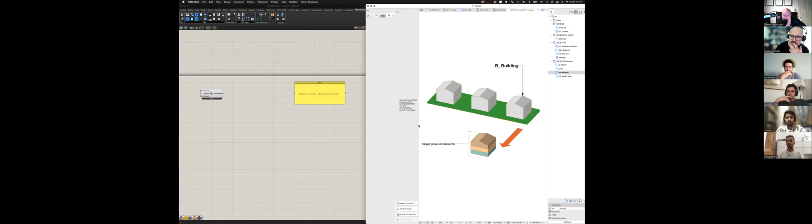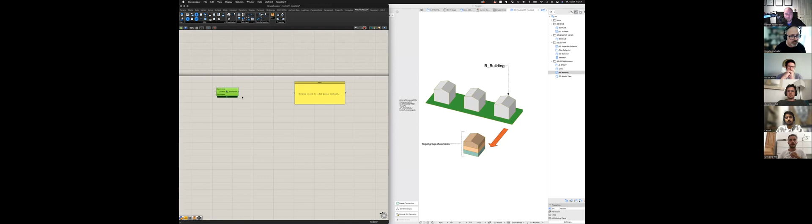So the first step: I have here a super simple example of some elements. We have one copy of ArchiCAD open here. Also, I have a Live Connection established to this file. It's not necessary for this add-on to work, because it communicates with ArchiCAD through a port, a separate communication port for these API functions. The difference between Live Connection and this Tapir plugin is that they are in fact complementary, because we can use some of the nodes from Live Connection to get the elements and work on them. So the first step each time we want to start with the add-on is to establish the connection. And for that, we have this node called the connection port.

And most of the nodes work like this: they have a print to panel output, and some inputs which in fact control what we see in the print to panel. Thanks to this, we have a kind of menu where we can choose the options. So this is a workaround for choosing from many options. In this case, when we connect it, this node scans the available ports and connects with each port. So this is also time consuming, because there are around 40 ports available.

We can have many copies of ArchiCAD open at the same time, and we would like to connect only with one of the copies or all of them to make changes in all the projects at the same time. But in this case, I have one copy, so I have just one element to choose. This is the number of the port.

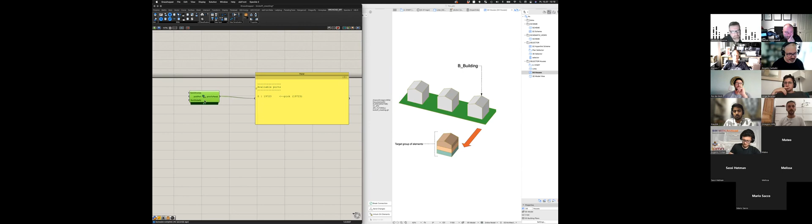So basically this is the first thing we need to do. To avoid this node searching for a port each time we make changes, we can turn it off, set it to false, because the port number is saved into the global variable of Grasshopper. It's there and will be used by other nodes to communicate with ArchiCAD, so to avoid scanning available ports, we just turn it off.

The other thing is something called run globally. It's for some functions, if we have nodes that are setting values to properties or reading them, and we don't want to do it constantly after each refresh, we can also set it to false. So it's like a global on and off for the other elements.

So let's start from the total basics. We have four groups of nodes. One is classifications, and here we are covering the possibility of getting the classification systems and setting the classification to an element. What is missing for the moment is getting the class of the element.

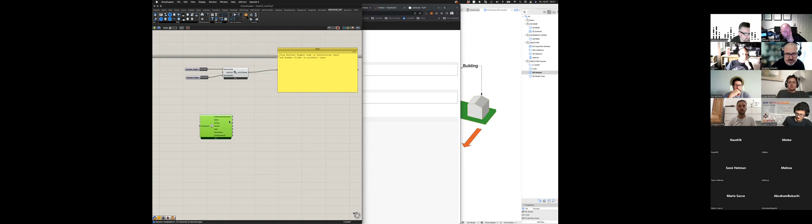Let's see first what classifications we have in the project. For that, we take the get all classification systems node, which is now reading all the classifications available. We can print it to a panel, and we see that we have 3 available classification systems.

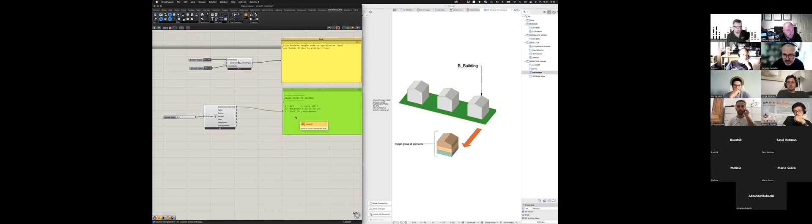If we check it here, we have 3 available classification systems, and since we have 3, we have to pick one. That's why we have the options to pick from. I'm taking a slider node just to pick from 1 to 3, and now I can choose from which classification system I want to see the classes.

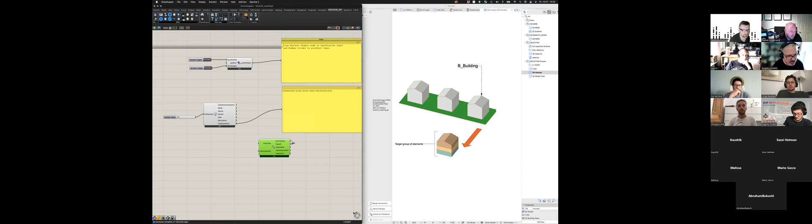I have here as an output the class system ID, so if I connect it, you see we got the ID here. I can go to another node, which is get all classifications in the system, and pick the panel. As an input, I'm connecting this ID, and then I have to again put some slider just to make it available.

Now it will read all the classifications, all the classes of this system. If I change it to number 2, it will show all the available classes of this system. We are now with the API system, and these are the classes of this system, so I should go here at 2.

Then we can automatically set a class for each element. But how to pick the elements? That's another thing. You can see here that we have a complex structure of this classification system - we have a building, and then we have some subclasses of this element.

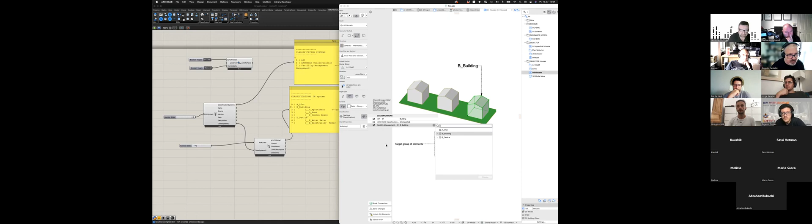Let's say we want to change this object, this element, to have a different class than it is right now - it's facility management and it's building, and we want to change it to, let's say, plot. So we need to pick the element from the project, and for that we got elements here that allow us to pick them.

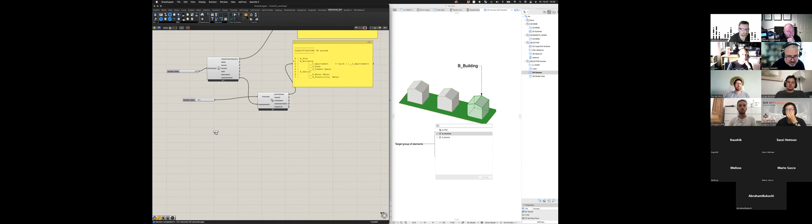For example, we can get elements by type. This is made of morph, so we can get elements by type, and again it reads elements.

Probably it needs now to be turned on, the run globally. So we need to wait for it. I clicked the other one - no, I need to open this one.

Maybe I will show a much simpler solution, since we want to pick only one element. As you can see, the performance of the nodes is also something we need to work on a bit. Let's change it to morph - I would like to pick exactly just this element, so I choose the standard node and pick just this element.

Now I have the element picked, and we can see that this is the element. What we need to get is the ID of this element, so for that we have a special node called get element ID.

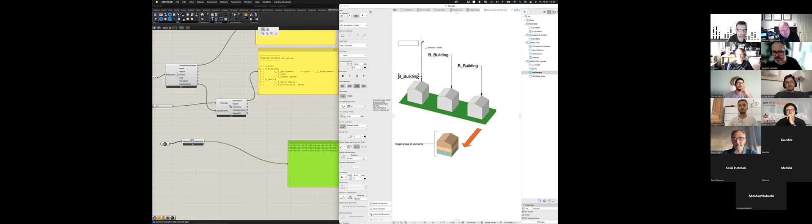In some sort of parametric way. But if we wish to select individual elements, say that you have 200 columns but you want to select 5 of them manually, then you can use the actual current live connection in order to pick the elements that you want manually, which is what Greg is doing now.

Yeah, exactly. Those options here, get all elements and by type, will select all elements in a project by type. So all morphs, or walls, or slabs, and all elements will just select all of them. So of course, in such cases, we would like to have more.

If you want to select something more specific, that's why we use the live connection node to select the elements. So for example, here I select these 3 houses that are made of morphs, and then as you can see, then they are, if we go to list item...

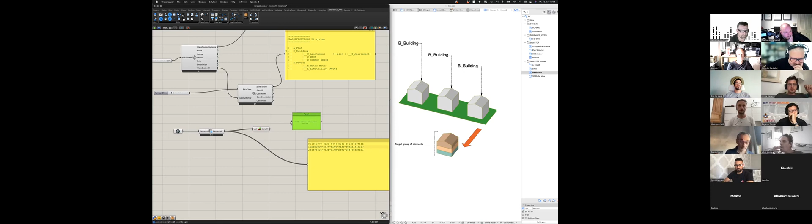No, list item, list length, you will see that of course it will just show the number of the output as the number of those elements. It's crucial because we will use something like serialization of the data output.

So we will combine outputs. If there are like 3 or more outputs, we would like to have it as one output that could be used as an input to another node.

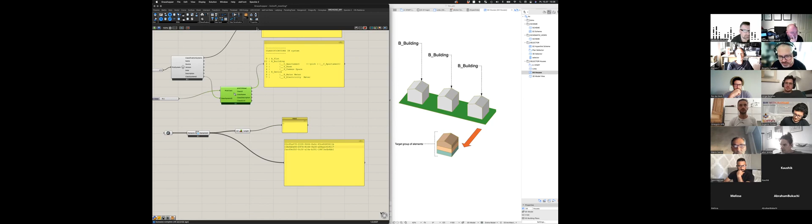So in this case, we would like to change the classification to something else. So we choose the other classification, like apartment here, and now we want to set classification of elements. So...

We need the agreed internal number of this class. So this is this number. Then we need the internal number of the class system, so it's here. And then we need element IDs.

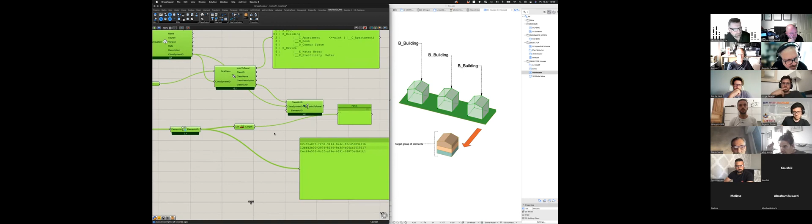And if I will just connect it like that here, it will show an error since it's performing this action 3 times. And in fact, we would like to send one bunch of data that consists of 3 individual GUID numbers.

So for that, we need something that is grouped in this block as a data serialization. So we serialize the list. Thanks to this, we have the output here. But if we connect it, you see that now it's a list, but in fact it's just one element.

So in fact, the output, if we go to list length, we will see the difference - that it shows just one output. So one set of data is at the output, and this is what we are connecting here.

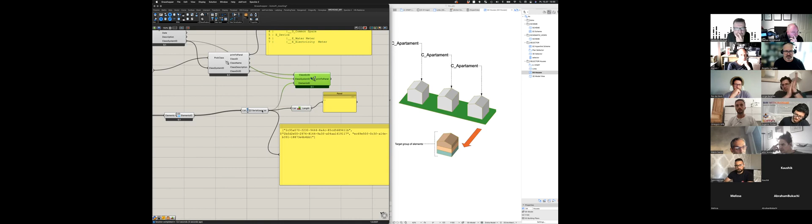And now you see that the classification is changed. Yeah, so this will be useful in many cases.

For example, with BIMx, if you would like to make a hyperlink, probably you saw those movies where one hyperlink allows you to select a bunch of elements. So to achieve that, we are serializing the list. So we have one bunch of data, but with multiplied IDs.

Yeah, okay. So one thing that I want to say, this is a quite simple example, but I think it's already showing the potential of this. So first of all, I want to just stress a few points that we've discussed.

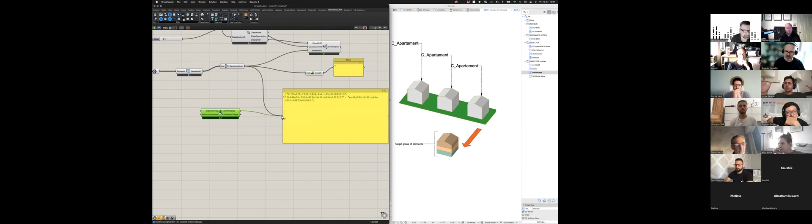One is, using the plugin, we can connect to any of the open ArchiCAD sessions, but we can connect also to all of them at the same time. Think about managing attributes or managing classifications of, I don't know, a bunch of hotlinks, for example, all of them together. So that could be possible.

The second thing is the current live connection. With the current live connection, sorry, you can set classifications, you can set properties, etc. But you can only do this to new elements that you are creating from scratch using Grasshopper.

What we are doing with this plugin, which is something new, I think, and it's important for people to understand, is that we are manipulating elements that have been created in ArchiCAD in any way - it doesn't matter, with Grasshopper, with the API, with anything, or manually. And then through Grasshopper, we can access those elements and we can rewrite properties, we can rewrite the values of classifications and so on.

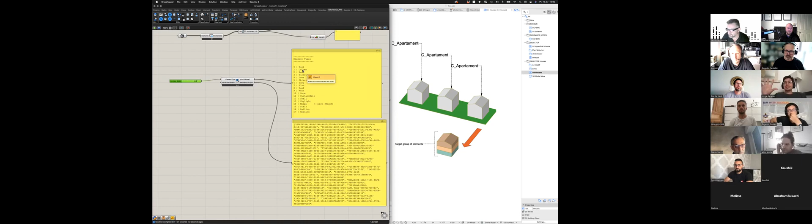So we don't need to create new elements from scratch. We can read the elements and then we can change the elements - change only the data. At the moment, there are no API functions that can handle geometry, so it's only focused on the data and properties at the moment.

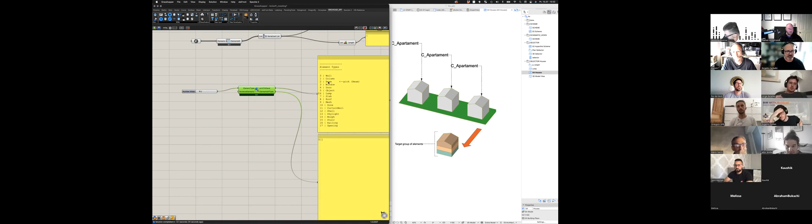This is what I wanted to show previously. We can pick the elements just by types. You see we have a list of all the types and we are controlling this by this slider. For example, we see there are no beams in this project right now.

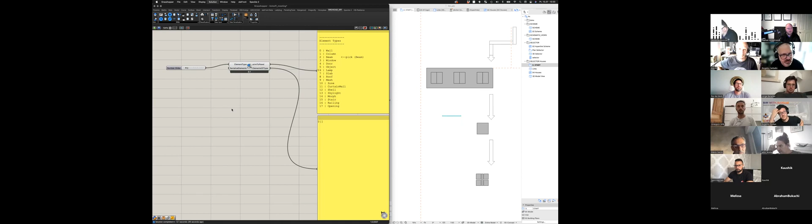If I go here and just create one, it should... probably we need to refresh the global variables and refresh it. The main issue here is a bit with the performance. It runs in Python, Iron Python, in Grasshopper, in Rhino.

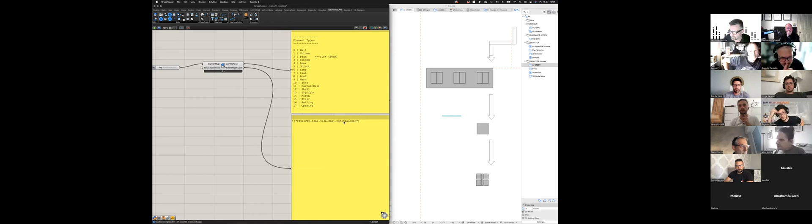You have it there, and it's already here. You can see it found this beam and just gave us the ID, so we can now do something with this beam. I think it's undefined - it's a matter of changing the classification of this element.

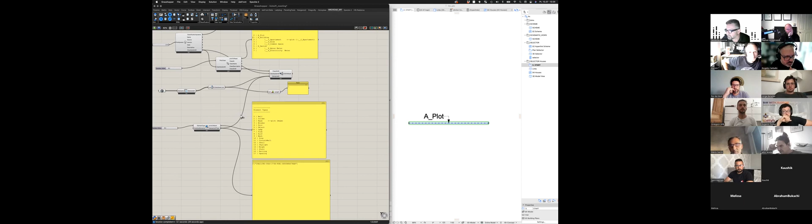But let's say it's a plot, and if we provide it here, it probably... so now I provide this element to this, so you see it automatically performs the change of this classification system. So of course that's how we can build those elements. The other thing we covered so far is classification, and the other thing is the properties.

With properties, I divided this into two kinds: built-in properties and user-defined properties. This is quite interesting because normally this Python API has no distinction between them. You can get all the properties and then you have to pick from the bunch available, the one you want. With this solution, at least they are divided at the beginning into built-in and user-defined.

User-defined are those you define normally in the classification and properties system, and built-in are just those that are read-only properties mostly, except for, I don't know, the ID of the element, which you can change. For example, here let's go back - let's change it to ID element to show what is the ID.

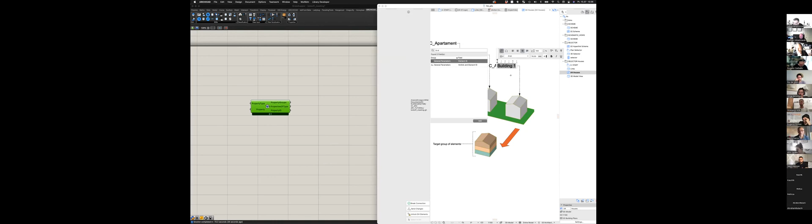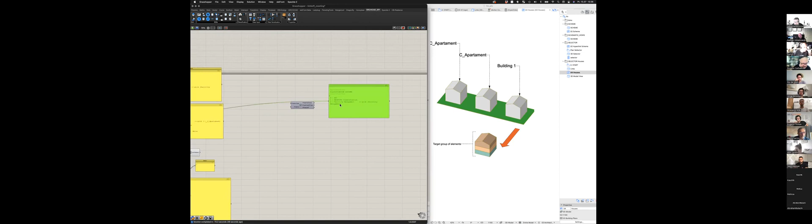Okay, it's building one. So we will try to read the ID of this element. How it works - again we have the node that we need to connect to a panel to see what we have.

These are the groups of built-in properties. They refer to type of elements - we have general, we have geometry, and anything that refers to the types of elements. So ID of an element is in general, so already by default it's set to 15. If you want to set this, we need to just make a slider from 0 to 30, so we can connect it.

Now it will go to revision, so we will have a chance to pick properties from the revision group. One of the things I'm interested in - I haven't tested on the Windows machine, and I think the performance might be due to differences between the Mac and Windows systems, and how Rhino and Grasshopper work on different systems.

Okay, so I have another panel here. Maybe I will put it like that, and I will connect the properties of the certain type. So now we have a revision type, and here are the properties of the revision. As you can see, it's done in a very simple way.

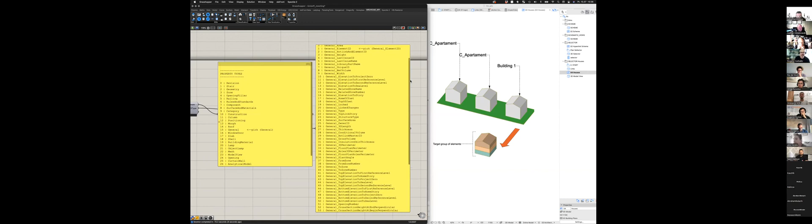Okay, so as you can see here, we got a lot of them, and already it's picked up this element ID. So you see it's number 1, and we can change this by assigning another node here.

Just answering on the fly to Sebastian. The unique ID, it's something that we cannot change, of course, but it serves us to select the elements.

But as you can see now on the screen, in the general properties, you have access to the ID of the element as well as the hotlink ID. So I don't know if the hotlink ID is something that is a property or we can change, but we can try. For sure, we can read it.

I'm sure we cannot change it. Of course, this unique ID is something that's assigned automatically to every element in the ArchiCAD project, and in fact, the API is connecting to any element by this GUID. And what about the hotlink ID?

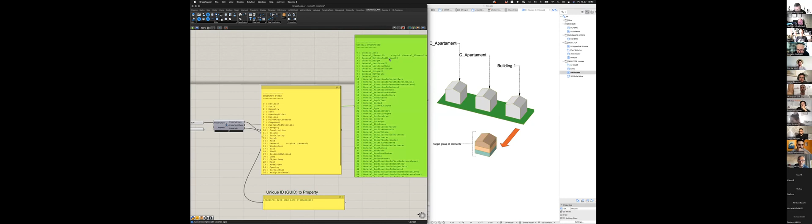I think also there is something like hotlink. It's there, it's 29, yeah it's here. But you need to have a hotlink here. I never tested this one. Okay, I think it's the ID of the hotlink.

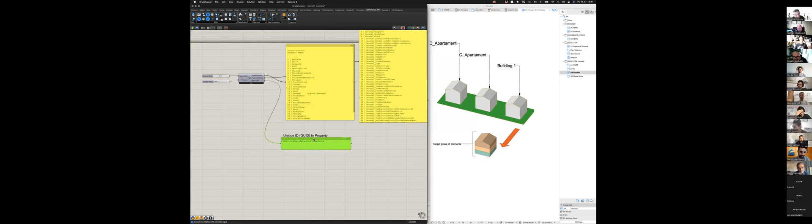Let's see what it... well, we need to read the value of this element. So I would like to show you first the whole process. So what we have now, we have an ID of this certain property. So we picked it up in this way, and then now we can use it. So how can we read the data?

We have here 2 elements like get property value and set property value. So let's start from get property value. We see that, of course, we have here the output, it will be the output we want. And then we have a property ID, elements that we want to read value from, and option to serialize this list. So I will connect this here.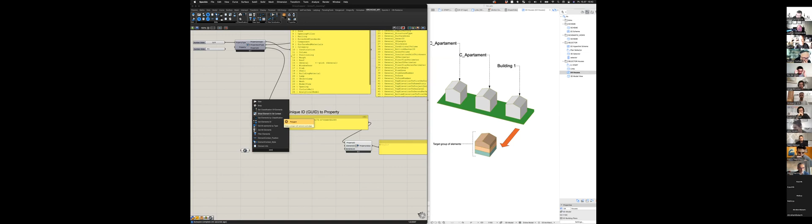So already he knows what property we want to read. And now we would like to have, again, so let's pick the one that was here. Okay, get element ID, probably it needs serialization. It's only one, but it's the matter of the format. The format, right?

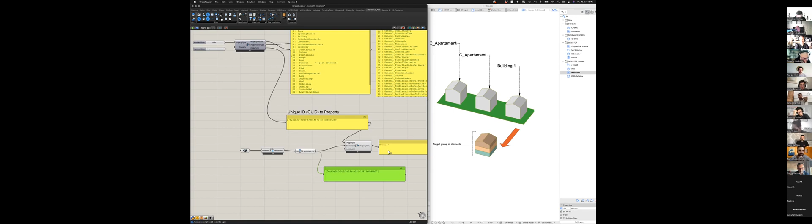So we got the ID of this element. And now we can connect it here, and here we'll see the result. So it will read the value.

So as you can see, it can read the value, but also this JSON API is not giving us only the value, but it's giving us a type of this property. In this case, it's a string. And status - honestly, I don't know what status means. I found every property has this normal status. It doesn't matter for the moment.

So, and this is like, as you can see, it's a list and it's a dictionary. So it's like value, name, a key name, and the value here, and again key and value. So to obtain this particular string of the ID, we need to separate this.

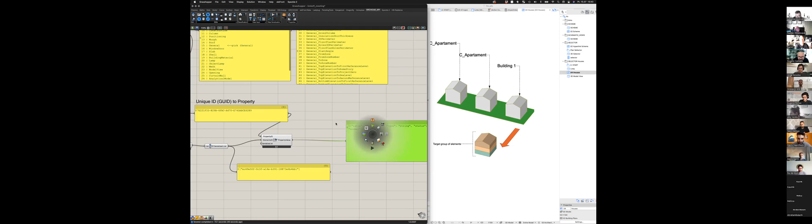So for that, we got the node that is called the serialized property. So you see that we put the property here as an input, and it will just divide it into the 3 outputs.

So exactly here we can see that I go to, so I have a value here. If I copy this, you will see that we have this type and status, but we are interested in this. So that's why we can obtain the ID of any element.

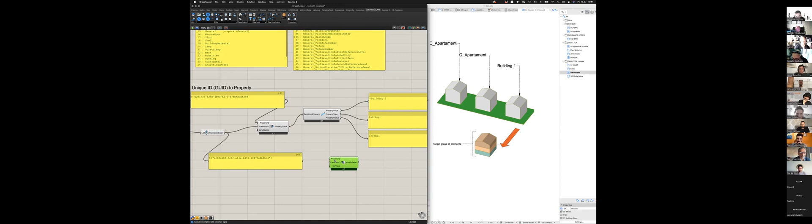Okay, and if you would like to change this ID, we need to use a set property. So set property value, and again we need to provide the property, provide elements serialized, and we need to provide a value, which in our case will be just like 1 element.

This node works in this way that the number of elements we provide, then we need to provide the same number of values. So each element will have the separate value.

So in our case, if we want to set like a new value ID, if you would like to get the new value here, we need to provide it, but we need to provide it as a bunch, as a serialized list. So for this, I think it will be enough if we try to serialize like that.

Let's see how this structure will look like. Okay, so we have, you see, it's simple because we got just 1 element, so just take 1 and serialize it, and now it could be connected and it should work.

Okay, the print to panel. Okay, we see the value is set now. If we would like to have more elements, we need to create this list with the same number of values as the number of elements. So I think we can do it with the value series. I will just show this one just to show you.

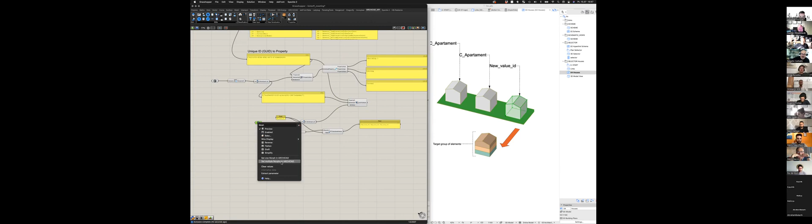I must say, Greg, this is a very typical, not issue, but it's a typical behavior on Grasshopper side. Like I always refer to this plugin, I would like this plugin to be close to a plugin called Elephant, that is for data management and so on. So in Elephant, you have to do the same thing. If you wanna set 20 values to 20 elements, you need to repeat that value 20 times. Of course we can improve from what is already being done, but I think this is something that is relatively easy to understand, at least for now.

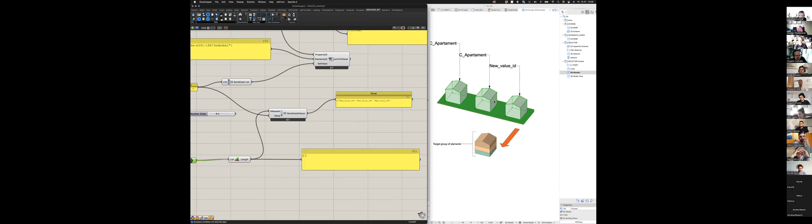Exactly. Let me try to quickly show you that we have now 3 elements saved here. So we need to just make this element list length, so we show it 3 times. Okay, it was 3 before, so you can see the difference. But now this output depends on the number of elements we provided. So let's say that I will delete those and put the values here to see.

Okay, so these are IDs of those elements, and we would like to apply it now here. So elements must go here. Okay, they need serialization again. So the ID of element, element IDs, then the serialized list, and this we can provide. Let's say I will disconnect this one.

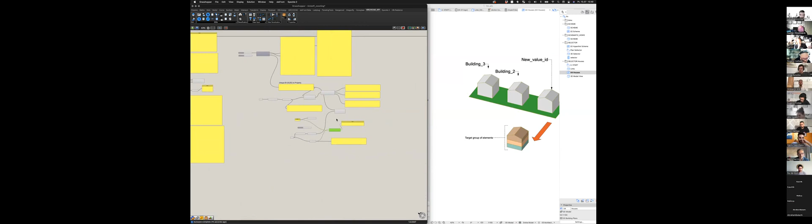You see, this is the moment when the run globally is helpful, because I want to wire it up without running. Now I would have to go to the connection port and turn it off, wire it up, and then turn it on. Otherwise, it will start to work just during the wiring. So we have element IDs, and set values are here. So like that, it should work. Or I mixed up something, no.

Okay, so the source is the same. You see, you have those three. Okay, it changed the values. So that's how we can do it. Yeah. Okay, so these are the... Mm-hmm. No, just a couple of things.

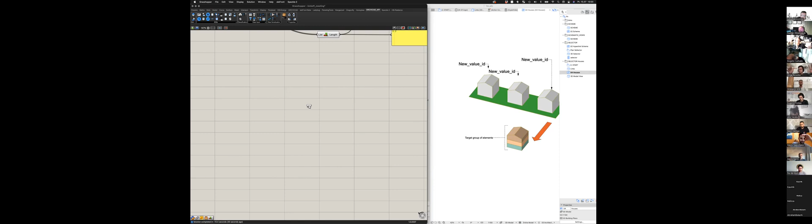So I think the concept is relatively simple. We have all this bunch of nodes with the selection nodes or the live connection nodes. We select the elements that we want to work with. I think we need to work a little bit, as part of the development, on the filtering options of the plugin. People who are familiar with this Elefront plugin like the filtering; for example, you don't always want to get all the columns or slabs in one file. Maybe you want to filter through a property value, or through a classification system or something like this. So that's on the pipeline, working on filtering options for parametric selection of elements.

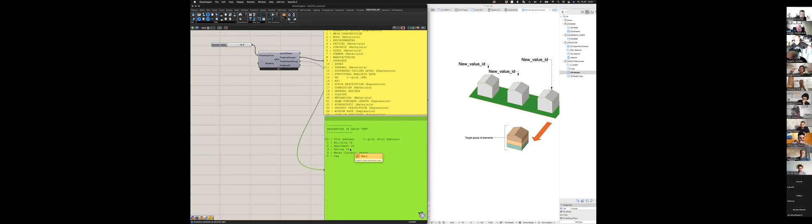But once you have the elements, you get the ID of the elements. Those unique IDs are basically enabling all the other nodes to work with the element. Then you need to find the property inside ArchiCAD. Even if it's a built-in property or a custom property, you need to find it using the nodes. For example, bring the built-in properties, look at the numbers, find the one that you want to change, read or write, and then you find the unique ID of the property, and that's the piece of data that enables the next nodes to read or write the properties.

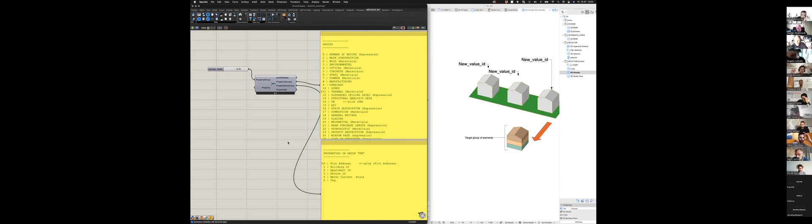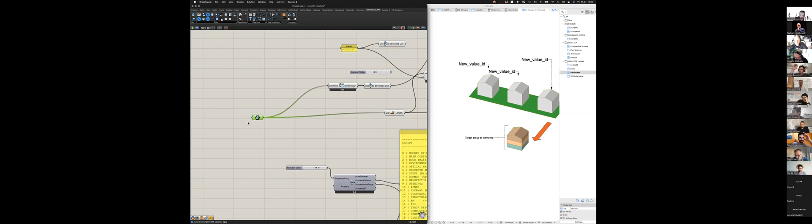There was a question though about serialization, and we knew that this was gonna come, because it's maybe a foreign concept for Grasshopper. So the way that we have set it up now, well, I'm being too generous with my contribution. The way that Greg has proposed to set this up is through the use of serialization, which is a concept when you're programming in JSON, in order to compact a group of data or a list of data into the least amount of packages to send.

So the serialization is there in order to improve the performance of the plugin. I mean, it does work with the list, but when it's moving data, instead of moving it in, I don't know, 200 separate branches, it just compacts it in one line of text, one string, and then when you deserialize the data, it goes back into the tree structure that it used to be.

So again, once we start getting more technical in further meetings or discussing with possible contributors, I think we're happy, both of us, especially Greg, to discuss improvements on the performance. I think Kaushik had already mentioned maybe building the nodes in a compiled C# mode or a compiled Python plugin. So this is a little bit beyond our capabilities. So we're very happy to see how we can improve.

Yeah, exactly. I'm just showing again now the difference in what goes as output. So we got 3 elements here, and as we can see, the list length is 3, and the elements here are just sent as 3 separate bunches of data, right? So it performs this node 3 times, and the serialized element just takes them into one string

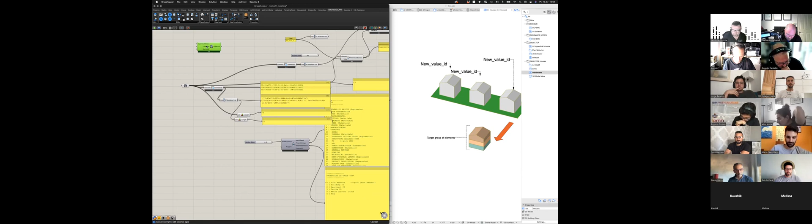And this is also very helpful with the BIMx options, where we would like to create the hyperlink to a specific bunch of elements. So thanks to this, we can create the link element. I think that was the case here, where we have a hypermodel link. I'm not sure whether to cover the BIMx functionality here. I assume you were watching the most recent video we dropped. It explains the basic concept. So I will not show it exactly, but I just would like to show this serialization process.

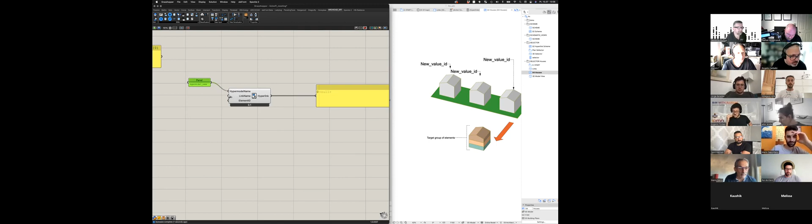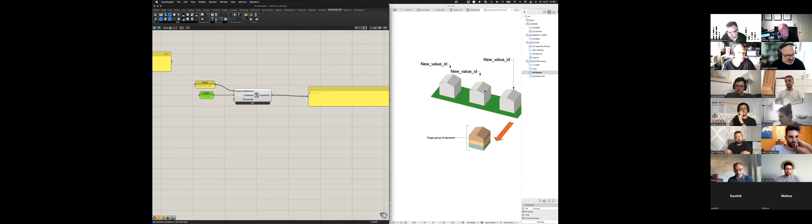So we need to provide the hypermodel name. Okay, we provide the name. Then we can provide the link name. This is just to see the link name, not the whole URL. Okay. And then we have to provide the elements that we want this hyperlink to lead to. So in our case, we can take those elements here. So we have this bunch of elements. I will take them here. And as you can see, they are 3 elements, but as one.

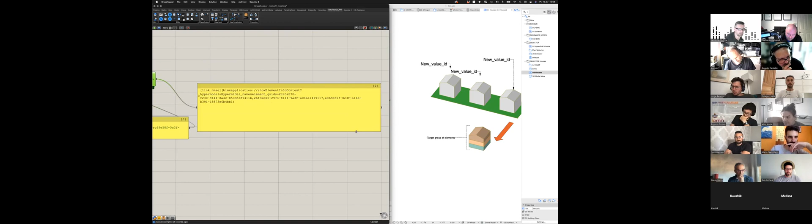And this is what we need, because when we put it here, we got the link right now. So imagine doing this by hand or in Excel or something. That's why I think it's not commonly used in BIM to create such links. It's relatively simple as a rule, but annoying to do by hand. So you see here is the link: BIM application, hypermodel, the name, and element GUIDs. Here we should put the GUIDs of all elements that we want this link to lead to.

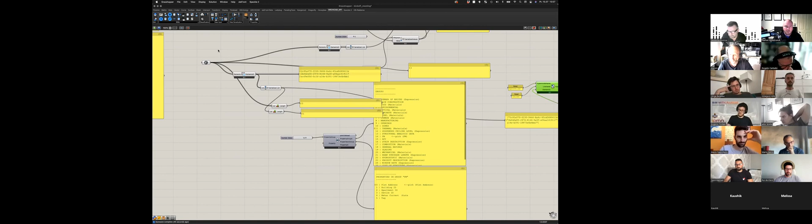So you see, thanks to this serialization, it's just treated as one string assigned to this attribute of the link. So that's why it gets used in many situations. We make use of this serialization.

Just before we go super technical, I think there is a bunch of questions in the chat that I'm trying to respond to. Okay. But maybe we can do another session more focused on the actual programming and technical aspects, because I think Aitor had some suggestions whether we can use a Python list instead, or some other stuff. Because I can tell that not everyone might be interested in these specific things.

So we had just, I don't want to be annoying, but we've been here for an hour. I think we had a little agenda. This is a little introduction on the

plugin. So as you can see, Greg, what it has done is go to the API site, analyze what are the aspects or the commands that are available in the JSON API. And basically we started creating or replicating the commands on the Grasshopper side using the Python nodes in a quite simple way. And that part can definitely be improved.